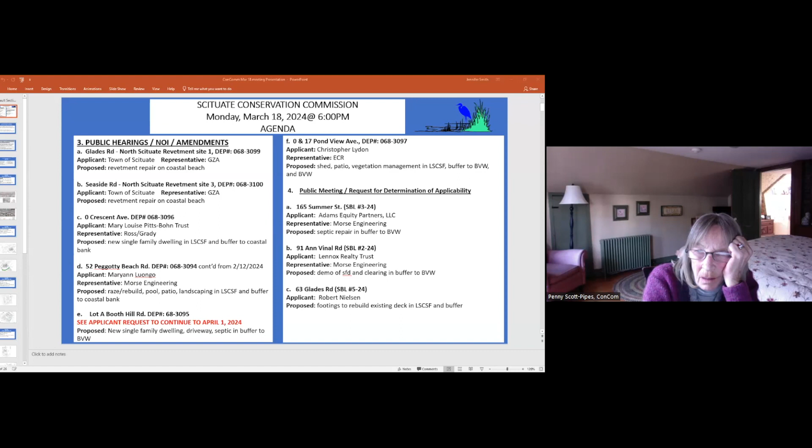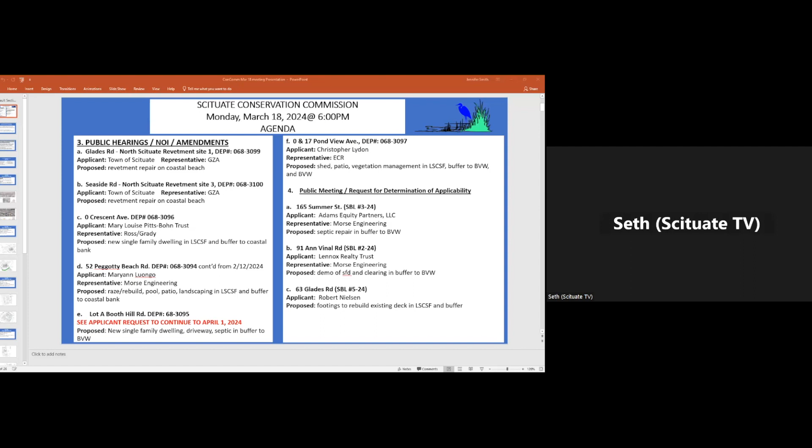So, it's Doug. I don't know. It's Doug because we need Doug to make four. We only have, Mr. Doug is here. Mr. Doug, if you want to unmute yourself, I'm going to ask you to. There you go. Hold on here. You do have Doug. He's just not unmuted himself. He only wants to be half in. Hey, there we are. There you go. Hi Doug. Awesome. Hello. Thanks, Seth. Thanks. Keep an eye on us.

So we have Penny, Doug, Eric, and myself at the moment. Yeah. Okay. And we're hoping for Brendan. And we're not expecting either Jen or Richard this evening, correct? Correct. Okay. All right. Well, I think we're ready to at least kick the ball.

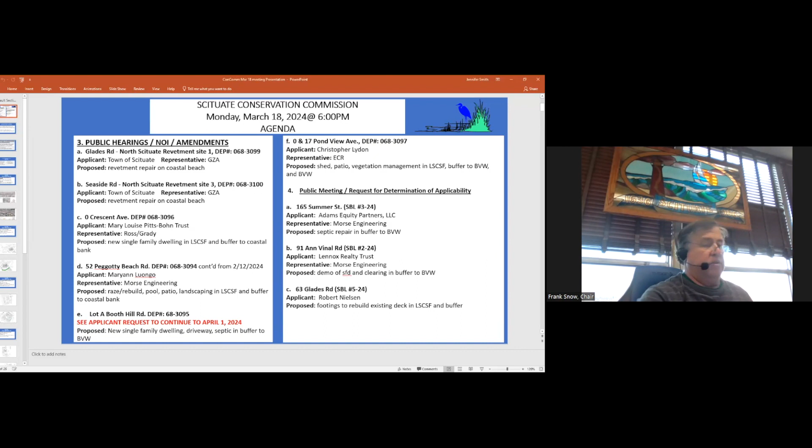So welcome to the Scituate Conservation Commission meeting for Monday, March 18th. I just got a couple of quick things to read. This meeting's being held virtual as an alternate means of public access pursuant to Chapter 20 of the Acts of 2021 and temporarily amending certain provisions of the open meeting law. You're hereby advised that this meeting and all communications during this meeting may be recorded by the town of Scituate in accordance with the open meeting law.

And number 2, the town of Scituate's commitment to diversity, equity, and inclusion. The Scituate Conservation Commission is committed to providing an environment of respect during our meetings. We ask all members to interact in a polite manner, even when there's disagreement. We value the participation of our community and want all participants, including marginalized and minoritized communities, to feel welcome and respected. And we ask our committee members and all who participate to commit to these standards and to support and respect our community.

With that said, we have an agenda. And maybe at the end of the agenda, we could just run by a couple of things of Appleton Field by whoever wants to comment. Eric, certainly. Any other questions? I think that was the only addition. Do we have any other additions or omissions? No. Okay. So I'll make a motion we accept the agenda as written and with the add-on of talking about Appleton Field. Thank you, Penny. You're welcome. So somebody needs to second it. Oh, I second that. Thanks, Penny. So Doug, all in favor? Eric? Yep. And Frank, yes. Thank you.

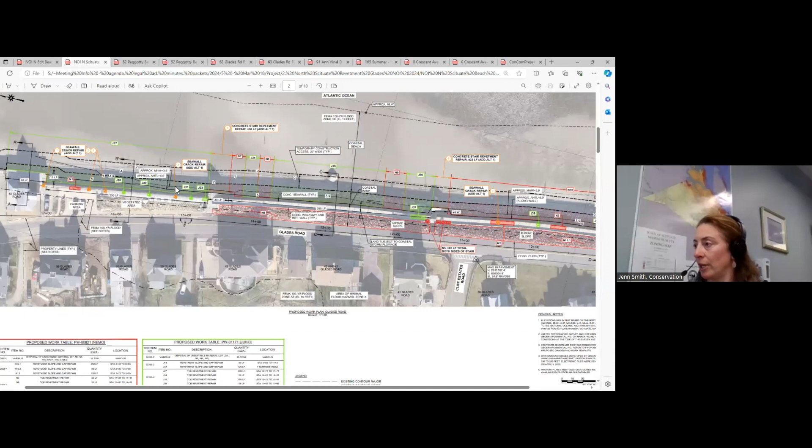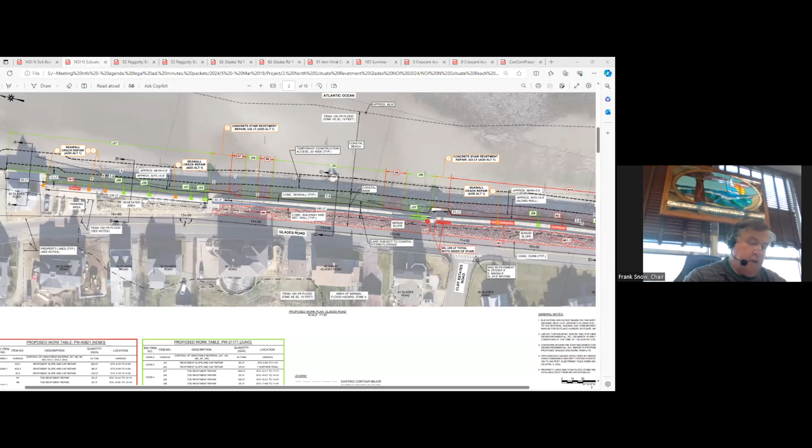Okay, so the public hearing NOI, amendments, the first one, Glades Road, North Scituate, revetment, Site 1. Who do we have on for that? And I gotta open that. Oh, yes. We've got a few people. Yeah, they're all here. Let me get that. Opened on March 18th, 2024 at 6 p.m. The Scituate Conservation Commission will hold a wetlands hearing under Chapter 131, Section 40 of the Massachusetts General Laws and Section 30700 Town of Scituate Code of Bylaws regarding the application of the Town of Scituate for work related to repairs to existing shoreline structures of seawall and stone revetments located in North Scituate by Seaside Road, Scituate. Abutters and other interested parties are invited to attend. Information to access the virtual meeting will be available on the agenda posted on the website.

Okay. And who do we have for this? Good evening, Mr. Chairman. Sean McCarthy, DPW Engineering. Oh, good evening, Sean. Also tonight with me is David Smith, our GZA coastal consultant that's prepared the drawings and the NOI for you this evening. Sean, before we go, should I open both of these? Do we want to talk about these together or are they totally different projects? Yeah, they're different locations.

We were trying to bid them together, only to save costs, by selecting a contractor that would move to each location. Okay. Permitting has disrupted that a little bit. There is a Site 2 that you'll be seeing next month. I think we finally resolved those permits. But we've taken a little different avenue on these. Prior to opening these Scituate conservation hearings, we've gone through all the state and federal permitting. Wow. So we have all our answers from those agencies prior to you developing your orders and closing. Okay. All right.

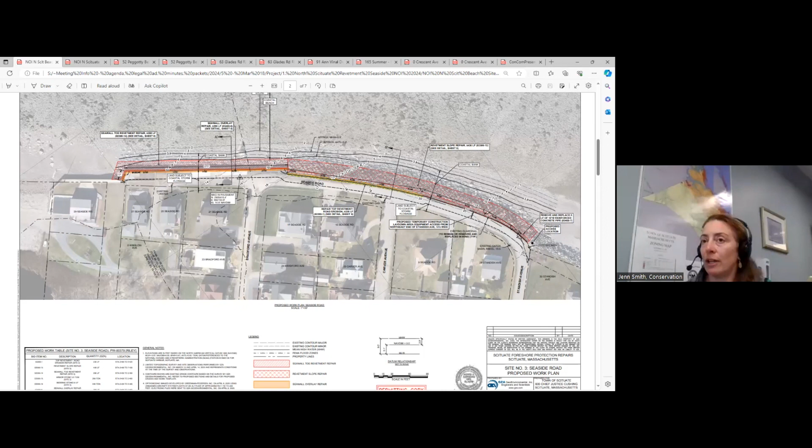Well, I guess we can just open this one and then we'll jump to the next one. Or I see Seaside up on the screen now. Is that the one you read? I just read Glades, I think. Oh, no, I did read Seaside. I'm sorry. You know what? I'm going to open both of these and then we can just roll from one to the other. All right. Okay. You guys can address them separately, but they'd be kind of the same.

So on March 18th, 2024, at 6 p.m., the Scituate Conservation Commission will hold a wetlands hearing under Chapter 131, Section 40 of the Massachusetts General Laws and Section 30700 Town of Scituate Code of Bylaws regarding the application of the Town of Scituate for work related to repairs to existing shoreline structures of seawall, ramp, and stone revetments at location North Scituate by Glades Road.

Abutters and other interested parties are invited to attend. Information to access the virtual meeting will be available posted on the town website.

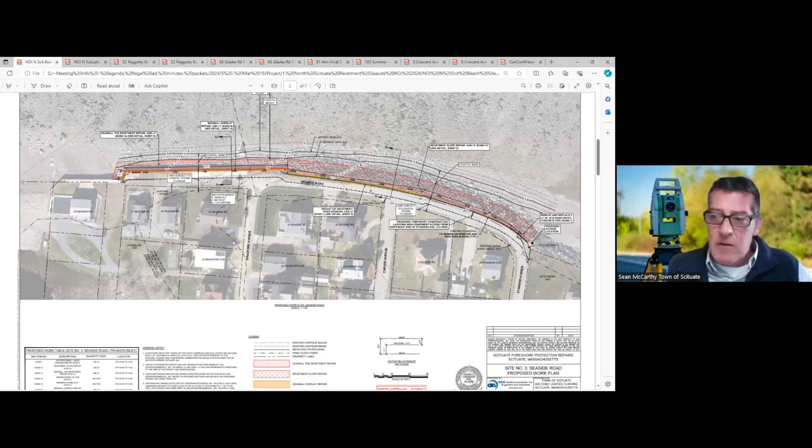Thanks. So you guys can launch it in whichever one you want to. Great. Yeah, I'll turn it over to David. He can better describe some of the details on both of these projects, but I will be here to answer any questions. Thank you, as well.

Sean. Right, thanks, Sean. If we could go back to the Glades drawing, I was gonna start with that one first. Yep, perfect. So good evening, Commissioners. My name's David Smith. I'm Project Manager with GZA Geoenvironmental, 144 Elm Street in Amesbury. Here representing the town of Scituate on this project, the North Scituate Beach Revetment Design Project, and this is Site 1. And Site 1 is predominantly along Glades Road in North Scituate.

The project is to address damage that has occurred to these coastal engineering structures as a result of 3 storm events, Nemo, Juno, and Riley from 2013 up to 2018. And then this Site 1 is actually further subdivided into 1A, 1B, and 1C. 1A is the area to the far left of the drawing here on the screen, and that's in front of 62 Glades Road. And that particular area is a stone revetment that is fronting an existing seawall.

And then the area just south of that, along that whole stretch of Glades Road down to the access ramp at Glades and Gannett Road, it's about 1,700 odd feet, is what we're calling Site 1B. And then Site 1C is off this drawing, and that's further to the south. It's a 125-foot revetment fronting 7 Surfside Road.

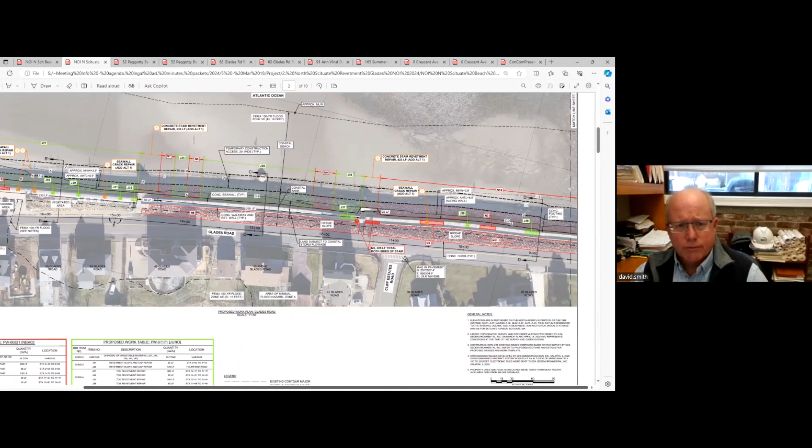We're looking to, as I mentioned, access this from both Glades Road with equipment, and then also accessing it along the beach in that 20-foot path from two locations. One is the access right of way north of 62 Glades Road, which is to the left of that drawing that's shown, and then also the access beach opening at the intersection of Glades and Gannett Road further to the south. And that access will also provide access to the area of revetment at 7 Surfside Road.

So we're looking to hopefully put this together to go out to bid in the fall of this year. And as Sean mentioned, this being site 1, you'll hear shortly from site 3, which is Seaside Road, and site 2, which will be before the commission, either the next hearing or, I think it'll be the one after. And that's an area at the end of Surfside Road in front of 91 Surfside. So all 3 of these sites we're going to try to bid together in the fall under one contract.

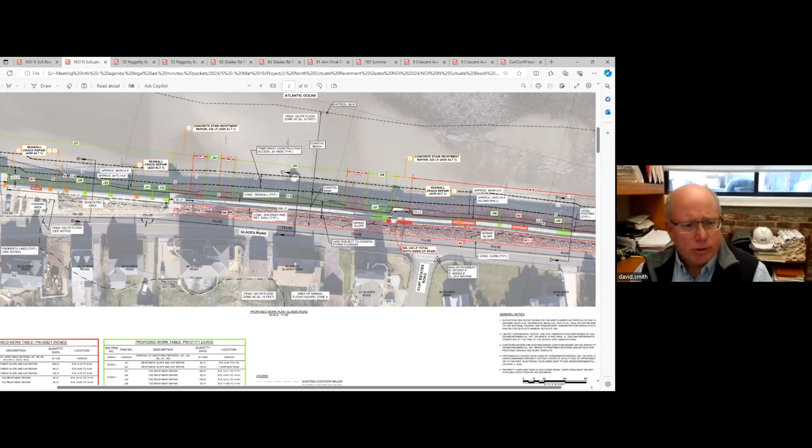As Sean had mentioned, we've obtained other authorizations on this site, and it took a while to get to the point where we're at. But we did get a MEPA certificate, and that was issued in February of 2023, a 401 water quality certificate in August of 2023, Chapter 91 minor project modification to existing licensed structures. That was in July 2022, and most recently, we got an Army Corps permit in December of last year. So with that, I think that kind of explains in summary what we're looking to do with the site. So I'll entertain any questions.

Sorry, carry on. There it goes. Okay, thank you. So I guess, well, why don't I start with some members?

Penny? Yeah, I only really have one question. It's great you have all those permits in order. So, the beach nourishment that's going on down the Gannett south, will that affect any of your repair? Because I don't know how high the sand's going to be coming up. Do you have any idea? Yes, I do. And the answer is yes, it would likely affect what we're proposing. Unfortunately, when we started this project back in 2020, we had the hopes of performing all this work way in advance of having the nourishment project done. Unfortunately, with the delays in this project, that's not the case.

So, in speaking with Sean, I think we're just going to see how this plays out as far as the sand nourishment, and hopefully it stays in place and all is well come the fall. And if that's the case, we'll likely have to adjust our work limits. But we felt that we would like to at least include the damaged areas in this NOI filing and get approval for it, so in the unlikely event that that sand disappears, we could at least do the work. We would have 3 years to do this, so we could certainly try to phase this work if needed, but we don't want to dig through 6 feet of newly placed sand nourishment to repair some revetment that's buried. So we're well aware of that, and we'll make the adjustments if needed. Okay, thank you. That was my only question, Frank.

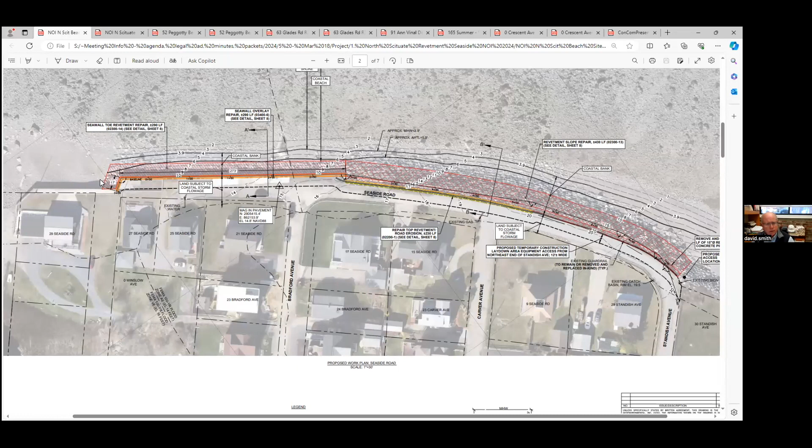This particular project site is a total of about 720 lineal feet, which you pretty much see within the limits of this drawing here. On the left-hand side, in the northern limit, there's a concrete seawall that has a 17-foot return. It kind of juts out from the other seawall to the north of that one, and then it runs north to south about 273 feet. This is an older seawall that's in pretty poor condition.

Got damaged from the Riley storm, March 2018. This whole site is damaged from that storm event. And the seawall got damaged, and also the toe revetment in front of the wall on the seaward side of the wall also got damaged. So that's what you see in the hatched areas on the upper part of the drawing, seaward side of that wall.

And then as you go south, kind of right at the intersection of Seaside Road and Bradford Ave, it turns into a full slope revetment there, where it meanders down to the south and continues along. And that's about 430 lineal feet, about 20 to 30 feet wide in that area. And then at the far southern limit where Seaside Road kind of comes in, where it meets up with this shoreline and then kind of deviates there to the north, there's also an outfall pipe that got damaged during that storm event.

So this particular site, we're looking to do the repairs. Again, it's in-kind repairs similar to Glades. These are prior authorized structures, and we're keeping within the footprint of the existing structures. The full slope revetment, actually both of these particular sites and work areas, we're envisioning that the work can be performed from the land side without the need to access onto the beach in these areas. We feel that equipment can be staged both behind the seawall in that section to the north, with working the revetment there, and also the seawall work, and then the full slope revetment to the southern limit.

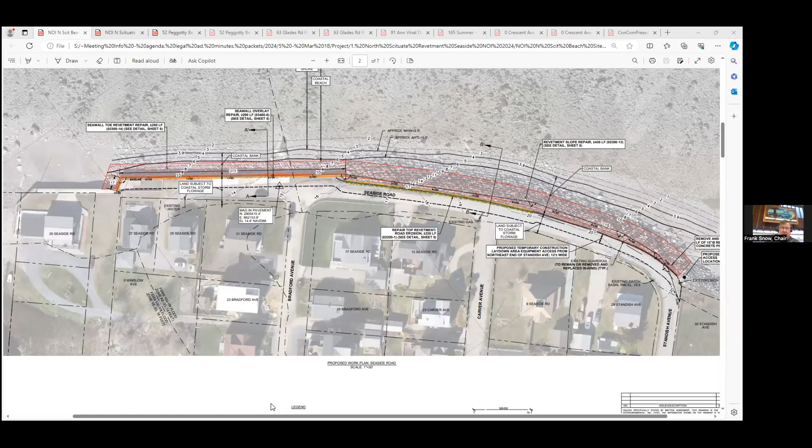Can I ask a question? I'm back to the other project in Minot, and I'm looking at where the ramp is, in a detail section.

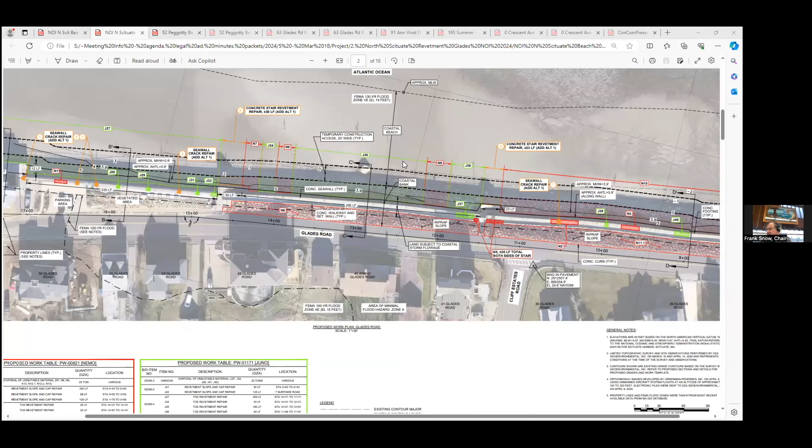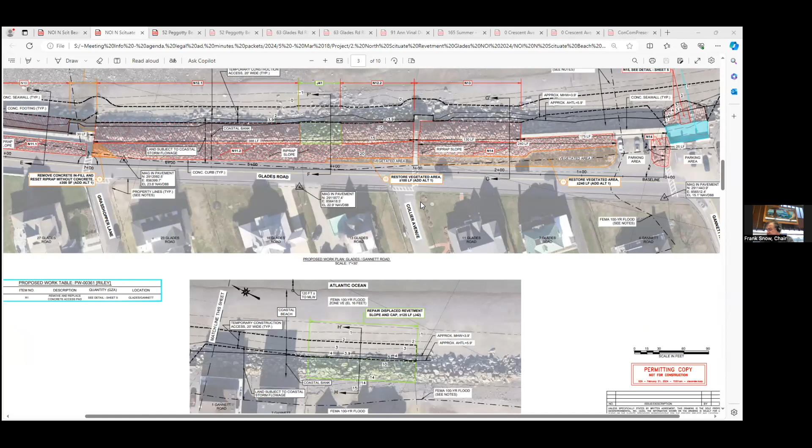So it looks like they're going to continue. There'll be a concrete ramp at first, and then some sort of walk that continues further onto the beach, and then there's stone.

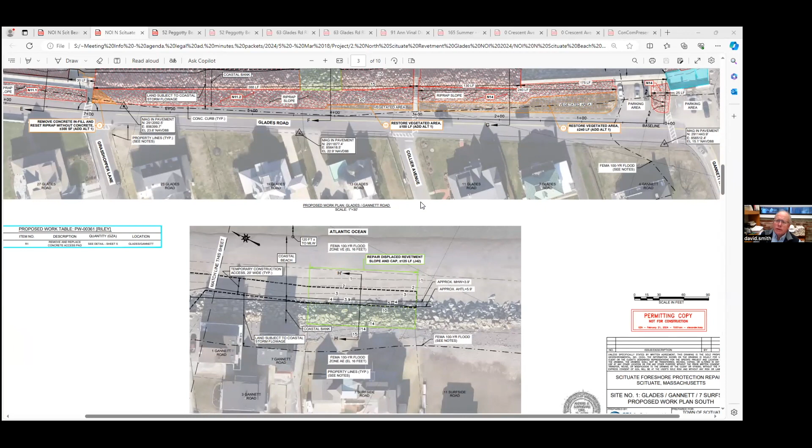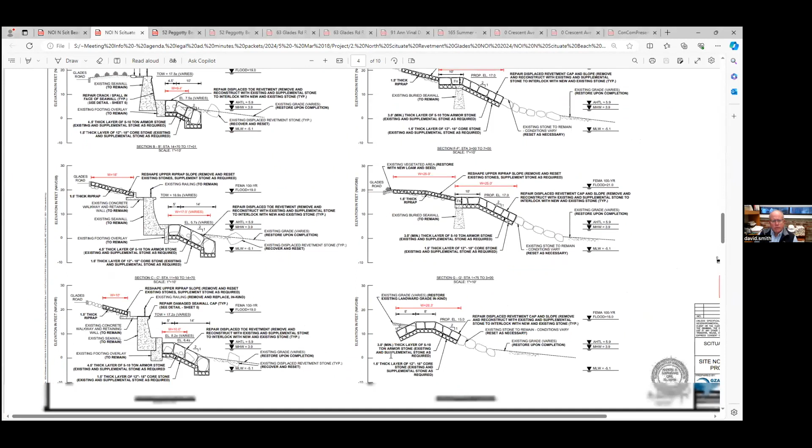Yeah, that's correct, that's what's out there now. There's a detail sheet if you keep scrolling. So there's that concrete, also shown in the photographs attached to the NOI. It's around 52 feet wide and about 22 feet landward to seaward, with another concrete section extending off of that, 12 feet wide and about 18 feet long.

So that area has been significantly undermined, causing that concrete slab to crack, and that's what happened during the storm event. The 12-foot width at that seaward section does make for nice access onto the beach in this location, and it's typically been used for access in prior storm repairs over the years.

So all we're doing here is basically replacing the concrete in kind. That edge of the 52 by 22 area is going to have a deeper extent to the concrete slab, almost like a footing, which you can see in the cross sections to the right. And we're going to improve the wing sides of that other section of ramp, fortifying it with stone that's there now, but removing and resetting it to prevent future undermining.

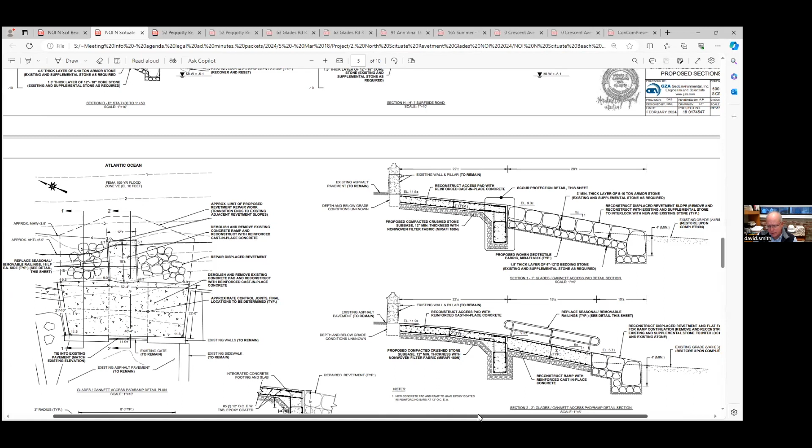And then that access ramp, the 18 by 12, will also be reconstructed, and that's going to have a revetment out in front of it to help protect it, because at the time we looked at this, the beach was significantly low. You can actually see that by the lower right-hand side, showing the existing grade line.

Now, the nourishment work that's taken place has pretty much buried this whole ramp, and I think that was the intent, to have it buried. But in the event that for whatever reason we're able to get this work done, that was going to be the plan, to rebuild that whole ramp system.

Thank you. Anybody else? Jen, any other thoughts or comments? Nope, it's good, I don't have anything else. We don't have anybody else in the audience with any questions.

I'll make a motion if you like. I make a motion we close Glades Road, North Scituate, revetment site 1, and Surfside Road, North Scituate, revetment site 3.

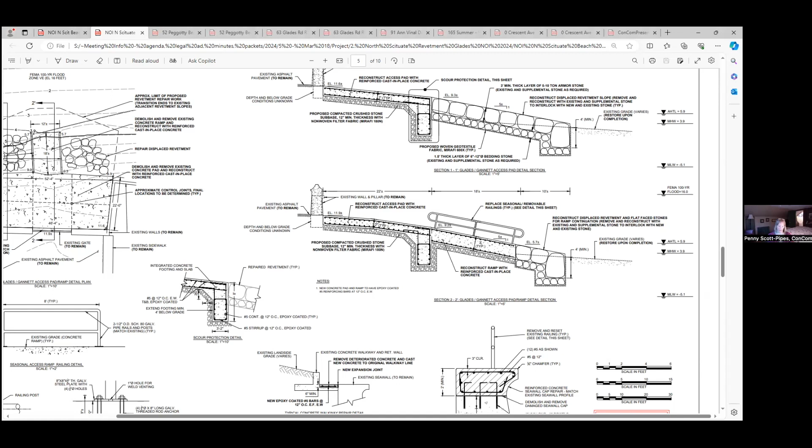So now, Lot A, Booth Hill Road, they've requested a continuance to April 1st, Jen? Yes, continue to April 1st.

Do you want to skip down and do that now, Frank? I think, well, that's the next one. Well, on my sheet it's not, but that's okay.

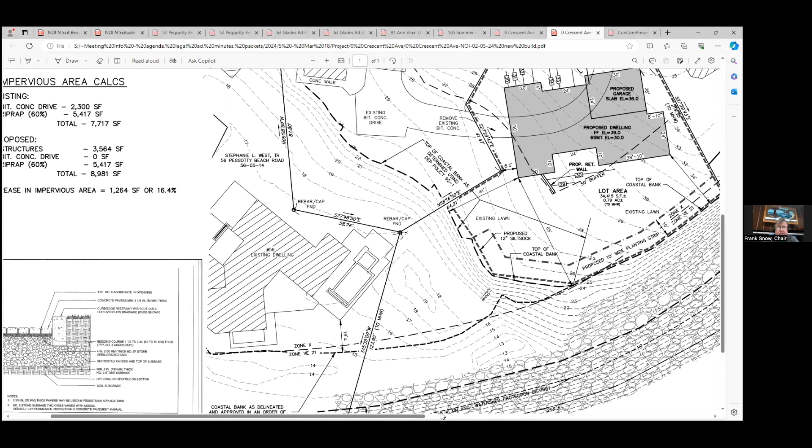Yeah. What we're doing is taking credit for the voids in the revetment. We're assuming that 60% of the riprap is pervious. What was the percentage? 60%. Really? 5,417 square feet. You can see it on the plan to the left there. And the driveway was 2,300 square feet. That's in the existing condition.

That's a total of 7,717 square feet. Then below that, we figure in the footprint of the house, which is 3,564 square feet. The bit. concrete drive is 0 because that'll be pervious. Then we added in the 5,417 square feet of the existing riprap and the revetment. That's a total of 8,981 square feet in the proposed condition, which is an increase of 1,264 square feet or 16.4%, which is below the 25% threshold.

The other threshold is that the proposed drainage patterns would stay the same, in that the water's flowing down that embankment and getting into the riprap. We aren't proposing to change the drainage patterns on the lot, but the impervious area calcs alone would put us below the threshold of 25%. So that's why we haven't submitted any stormwater calcs.

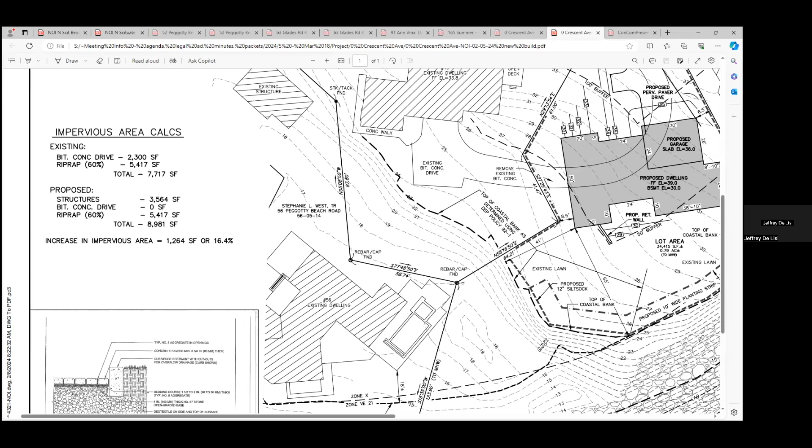Just a quick one, Paul. I don't know how you would... maybe Doug can help with that one. How do you figure an impervious area for a seawall or a revetment? For the riprap? Well, those are fairly large stones and the spaces between them are sizable.

For example, if you had a stone trench with 1.5 inch stone in it, if the trench was 2 foot by 2 foot, approximately 33% of that trench is going to be voids. But that's for the small stones. Here we have a revetment with the larger stones, and the voids are much bigger. So we estimated 60% in the plan. Okay.

I can see where a seawall might almost be considered impervious, even though it has flat surfaces, it's such large areas between them. Right. It almost seems inconsequential. The other thing is the water coming on that roof is considered to be clean water.

And any water running over the lawn is gonna be attenuated by the proposed plantings. It's stated in the narrative and the report from Stan Humphrey, so the plantings in the lawn area will help with any issues of pollution. But the volume of water that would come off the site is just gonna go into the ocean.

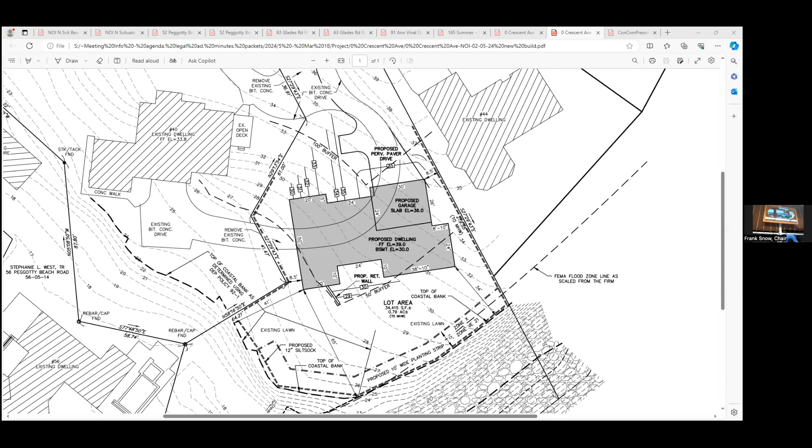And then continue to April 24th? Sounds good. Oh yeah, because we're gonna be on that Wednesday, right? Wednesday, April 24th. Because of town meeting, our second meeting in April is gonna be on a Wednesday night. Yep. Okay, so can I make a motion, Frank? I hope so. Okay, I make a motion to continue 0 Crescent Ave to April 24th. That's a motion from Penny. Do we have a second? I'll second that. From Brendan? Second. All in favor? Doug? Yes. Eric? Yes. And Frank, yes.

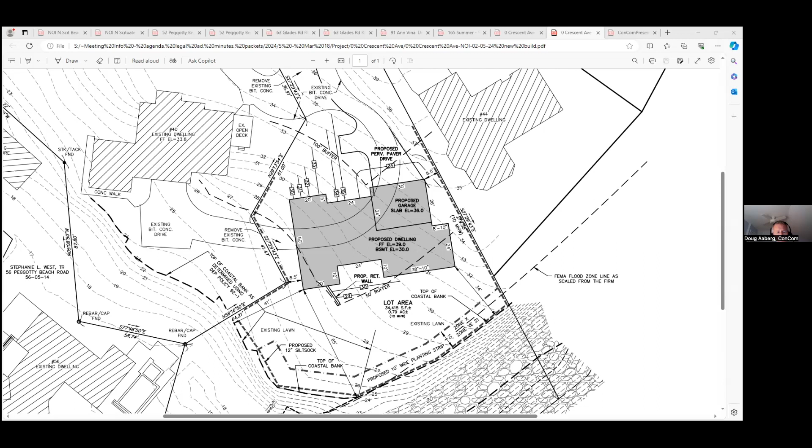Thank you, Jeff. Thank you, Paul. Thanks, Doug, for jumping in on that. Appreciate it. Thank you.

Interesting. 52 Peggotty Beach Road. That's been continued. Right, so you have opened it. Yep. Oh, they're not going to be on tonight? No, it's just, we don't have to open it. It's the next one on the agenda.

Yes. I know I got it mixed up in the beginning, but I think I'm on track now. 2 hours into it. Okay. All right, I think I unmuted. Paul? Yep. Paul Gunn? Okay. Can you hear me? We got you. Thanks, Paul.

All right. So, hello everyone. Just for the record, my name is Paul Gunn. I'm a design engineer at Morse Engineering. Here tonight for the continued notice of intent application at 52 Peggotty Beach Road, which includes the raise and rebuild of a single family house within the 100-foot buffer to a coastal bank.

Since this project was last before the commission, a planting plan and list has been prepared by Hawk Landscape Design for the proposed mitigation area. That plan includes native shrubs, grasses, ground covers, and perennials, and also includes 5 conservation posts that have been provided along the limit of the planting area.

Regarding the site plan itself, there's been no changes made to the layout or location of the house, the driveway, or any of the patios, but a small revision was made per comments prepared in a review letter by Deb Keller over at Merrill Engineering. This revision just included providing a third profile of the coastal bank to better help in confirming the bank's delineation. This profile is now shown as profile C on the site plan and lies between the 2 original profiles A and B. I believe that's all I have. I'll turn it to the commission for questions and comments. Thank you very much.

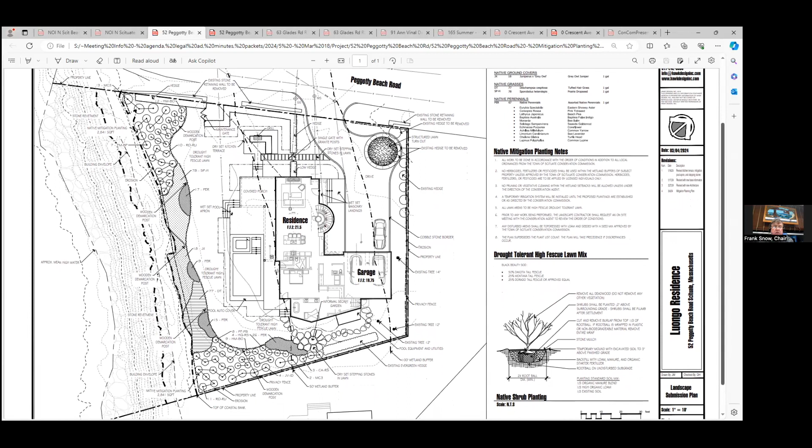About the location of it, Jen? Right. I think Merrill confirmed that. And like Paul said, her comment was adding that third profile. Oh, okay. Do you have a planting plan? A real planting plan, not just this saying mitigation. Yeah, we do. It was prepared by Hawk Landscape. All right, because I'm not finding it in my stuff, that's all. Jen sent it out to us, and I think I just missed it. Bad me, I'm bad.

And this is another one where the limit of work goes all the way to the bank. Okay. Well, they need that to add the plantings though. Yeah, but can there be another one? Can there be one closer for the house and then do the plantings later? The mitigation ones? Yes. The problem that I'm having is when we put these things up and we say

the limit of work is way out at the coastal bank, then the whole site gets used as a construction site and it puts all that construction material right up on the edge of the coastal bank. So if that were another resource area that we were more concerned about, there's no way that we would say it's okay to put erosion control right on the edge of a wetland and let them work to that. Is that a fair analogy? Mhm, yes. Can I say something?

Sure. Please. Okay, this is my feeling on mitigation: I don't want to ever run into another Collier Ave, which has never been resolved as far as I'm concerned. I would like a stipulation on all these properties that have the coastal bank that the mitigation has to be done first, before they start construction on these houses, to make sure the mitigation gets in properly. That would also help keep them away from the coastal bank with the actual construction, because they should want to protect the plantings. I am just very upset with some of the places where the plantings never ever get done. So just having finished. Yeah.

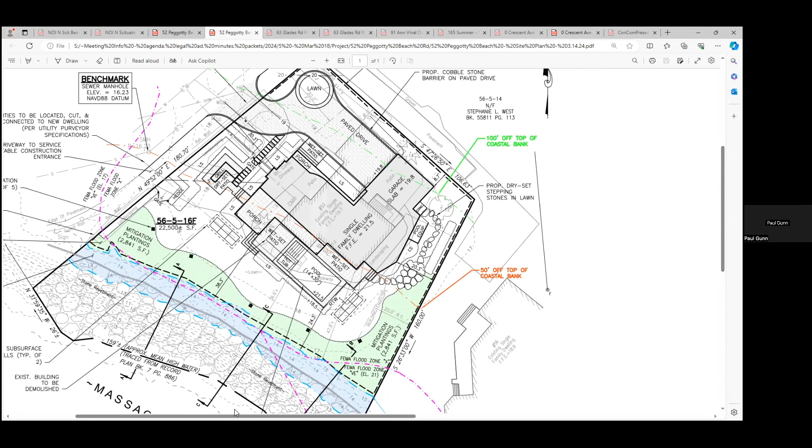Paul here again from Morse. I certainly think a kind of a phase one, phase two, if you will, set on the erosion control is possible. It's a little tighter on the south end by the pool, but certainly up towards the frontage area of the property, having a stage one erosion control closer to the house just for excavation is feasible. Thank you.

I mean, it looks to me like a pretty aggressive planting plan. Yeah, if it gets in. Well, we're gonna have to address that, Penny, as a policy from the commission. I'm not sure how we would address that at this time, other than it's in the orders and we don't give a COC until, and we'll add monitoring years to the plantings. Yep.

But what bothers me, Frank, is a lot of them, they don't care if they ever get a COC, they're gonna live there. They come back to us 20 years from now, oh, I need a COC because I'm selling. Well, so many years have gone by. I don't know. I just have an issue. We've had a lot of problems in the beach areas. But that's an enforcement piece, though, too.

I mean, we could have bonds. We could say, listen, you gotta plant this all out. The people plant it all out. They get their bond back, and then over 10 years, 15 years, to your point, they start encroaching with the lawn, and how do you deal with that? I mean, that could be an issue as well.

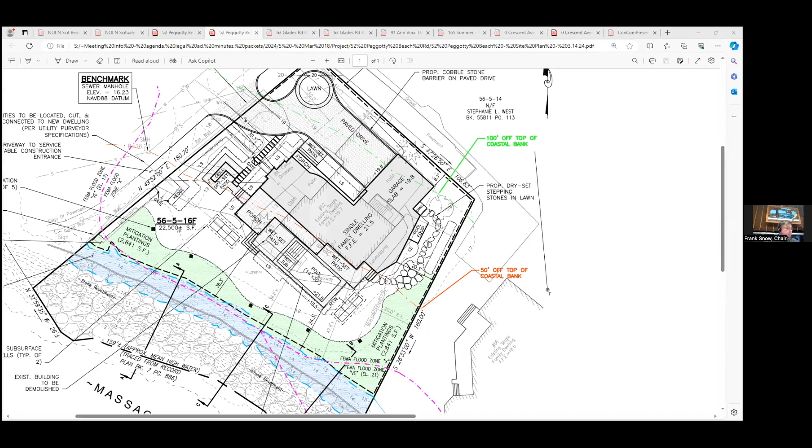So does anybody want to make a motion on this project? Make a motion to close. Do we have a second? I'll second that, Doug. All in favor? Brendan, yes. Eric, yes. Frank, yes. Great, thank you. Paul, thank you, Deb. Yep, thank you very much.

Okay, so now back to Lot A to open that, and I get to continue to open this one. On March 18th, 2024, 6 p.m., the Scituate Conservation Commission will hold a wetlands hearing under Chapter 131, Section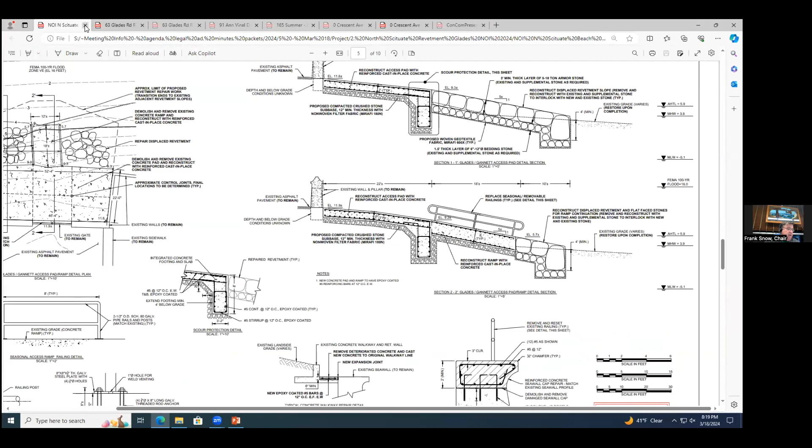40 of the Massachusetts General Laws and Section 30700 Town of Scituate Code of Bylaws regarding the application of Peter Freiling for work related to constructing a new single-family dwelling, driveway, and landscaping located at Lot A, Booth Hill Road, Scituate. Abutters and other interested parties are invited to attend. Information to access the virtual meeting will be available on the agenda posted on the town website.

So we've opened this, but we have a request to continue to April 1st. I'll make a motion we continue Lot A, Booth Hill Road to April 1st. That's Penny. Do we have a second? I'll second that, from Brendan. All in favor? Doug, yes. Eric, yes. Frank, yes.

And just for the record, this is a site that Jen and I had a chance to walk out to, talk with Art Allen when he was doing this wetlands review. It was an interesting project. So sometime, if anybody else has a chance to do that with Art, it can be eye-opening. I read his report, that was eye-opening.

Okay, so now we have 0 and 17 Pond View. So on March 18th, 2024 at 6 p.m., the Scituate Conservation Commission will hold a wetlands hearing under Chapter 131, Section 40 of the Massachusetts General

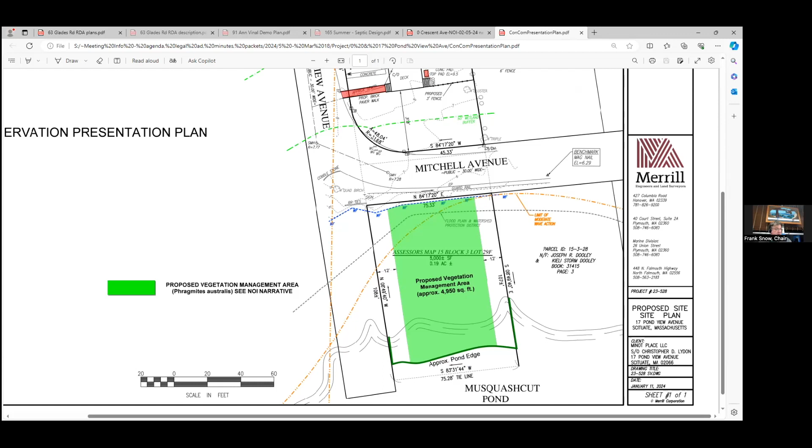Brendan? I don't have any questions at the moment.

Penny? No, it's pretty straightforward. The Phragmites, wow, that's a major job they're willing to take on there to try and get rid of that. But no, I think everything on 17 looks fine to me.

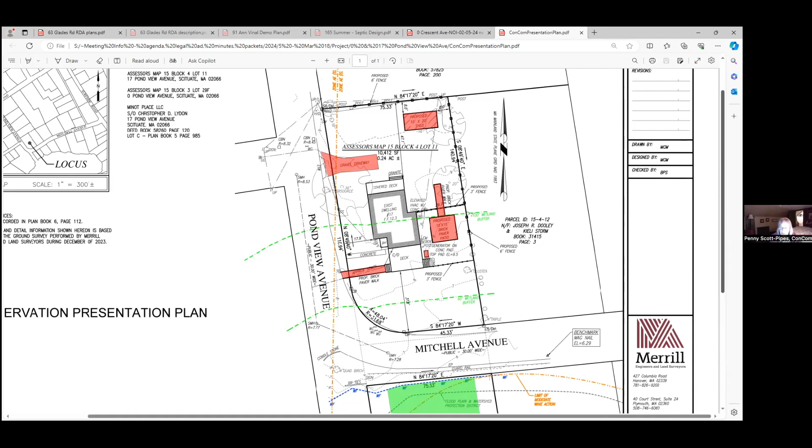Thank you. Doug? Was Brad tell me if I'm remembering it correctly, but some years ago, there was another project on Musquashit, Musquashcut Pond south of this, quite a ways south of this, with a similar project, vegetation management. Is that correct? Yeah, I've done a few in town, like 396 Hatherley. I think you did. You came before us with one. Yeah, I don't think it was Musquashcut. Maybe it was different, no, it was at the other end of Musquashcut Pond.

It was way up towards Mann Hill. Really? Yeah, Mike Gilligan wound up cutting it all down. Oh, well, yeah, but that's on him. That was a little bit more into the buffer of BVW, with some Japanese knotweed in there and some other invasive shrubs. I was just wondering how it was, how it work, but I haven't been involved with that since I did the pre-work meeting with Mike Gilligan. I'll have to see where he's at with that. I was just wondering how it was going, how effective the plan is. I know it's a slow, methodical process.

And you look around there, it's all around the pond, so you get to clear this one spot, but too bad everybody can't join in. But no, other than that, I don't really have any questions. I was just wondering about the effectiveness of it. It has to be managed yearly. It's not something that's a one and done in any event.

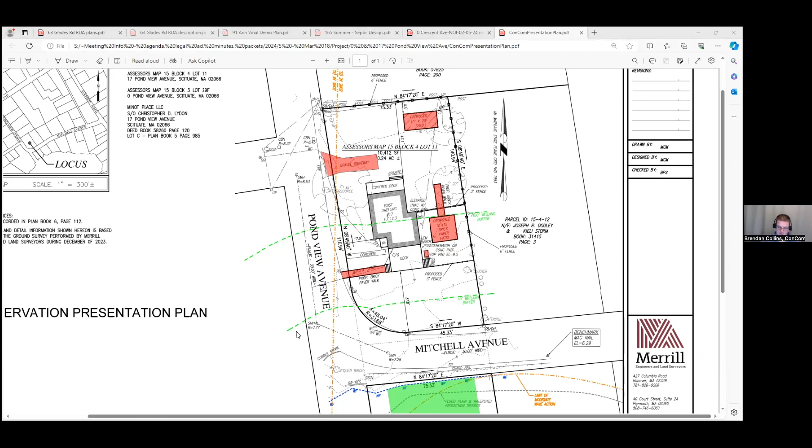Did I miss anybody in the audience? No? Okay, I'll take a motion on this one. I make a motion to close. Do we have a second? Second. All in favor: Brendan, yes. Eric, yes. Frank, yes. Thanks, thank you, good night, Brad. Have a good night.

165 Summer Street. On March 18th, 2024, the 6 p.m. meeting, Scituate Conservation Commission will act on the request of Adams Equity Partners LLC for determination of applicability under the Massachusetts Wetlands Protection Act and the Scituate Wetlands bylaws for activities related to a septic repair at a single-family dwelling at 165 Summer Street. Abutters and other interested parties are invited to attend. Information to access the meeting will be available on the agenda posted on the website.

And who do we have? We have Paul. Are you unmuted? Yep, I'm here. So again, for the record, my name is Paul Gunn. I'm a design engineer at Morse Engineering, here tonight to represent the applicant for the RDA at 165 Summer Street. The site is currently developed as a residential single-family dwelling with an associated gravel driveway and a mixture of lawn and wooded areas. The property abuts other single-family residential lots and has frontage on Summer Street to the west. The site generally slopes towards an existing bordering vegetated wetland on site that was delineated by John Zimmer in November of 2023.

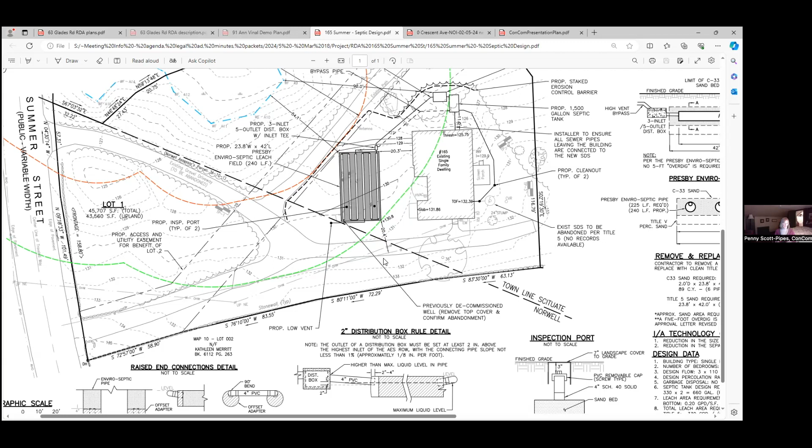Okay. I'll make a motion for... well, next. So this one is not accepting any of the lines. No, you're right, Jen. Yeah, there's wetlands lines going all over the place there. No, we're just accepting a new septic. I make a motion for a negative 3, please. And I'll second that. Second on that was Brendan. All in favor: Doug, yes. Eric, yes. And Frank, yes.

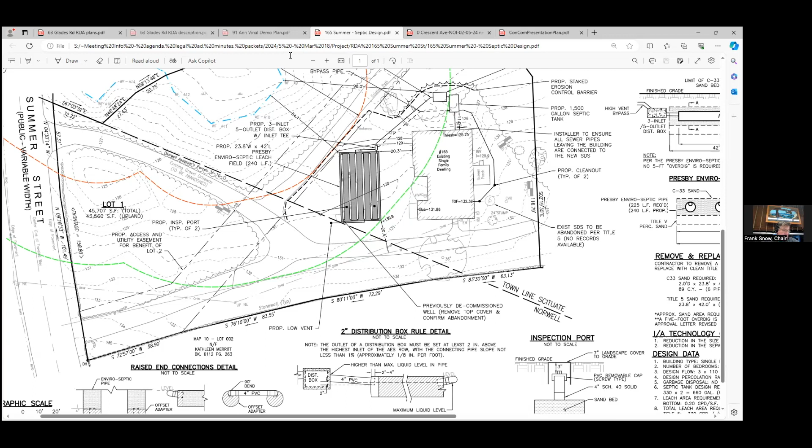Great. 91 Ann Vinal. On March 18th, during the 6 p.m. meeting, Scituate Conservation Commission will act on the request of Lennox Realty Trust for a determination of applicability of the Massachusetts Wetlands Protection Act and the Scituate Wetlands bylaws for activity related to clearing an area and demo of a single-family dwelling at location 91 Ann Vinal Road. Scituate abutters and other interested parties are invited to attend. Information to access the meeting will be available on the agenda posted on the town website.

And Paul, hi, should still be on. Yeah. Yep. Okay. So just once again, for the record, Paul Gunn, design engineer at Morse Engineering, here tonight to represent the applicant for the RDA at 91 Ann Vinal Road. So this site is currently developed as a residential single-family dwelling with an associated gravel driveway, shed, and a mixture of lawn and wooded areas. The property abuts other single-family residential lots and has frontage on Ann Vinal Road to the north, as well as a small portion on Pleasant Street to the northeast.

The site generally slopes to the west towards an existing bordering vegetated wetland that was delineated by John Zimmer in May of 2023. The property is not located in or near any certified or potential vernal pools, protected habitats, or other resource areas. As it currently stands, the existing dwelling is in a very poor, dilapidated condition. So the applicant is proposing the demolition of the dwelling and the shed, as well as the removal of quite a bit of accumulated trash and debris within the yard.

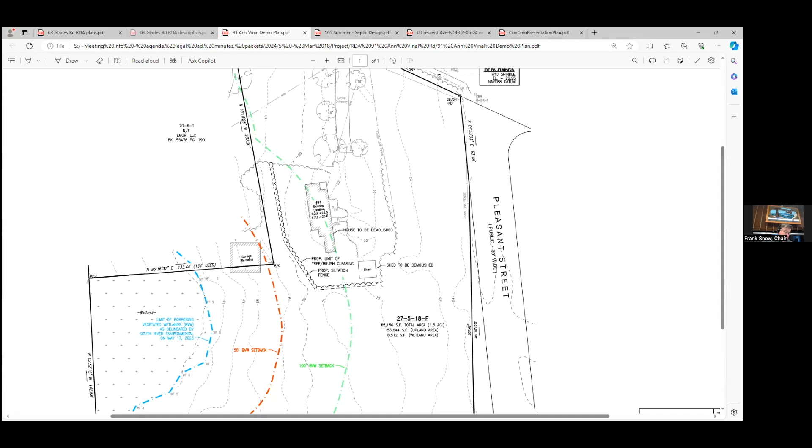So do we have, I think I asked anybody in the audience, Jen, any other comments other than, we're not gonna accept that wetlands line? Just the wetland line. No, when they come back, they'll. Yep. Okay, I make a motion for a -3. Motion from Penny. Do we have a second? Second. From Doug. All in favor, Brendan, yes. Eric, yes. And Frank, yes. Great. Thank you very much. Thanks, Paul. Have a good evening.

You too. On March 18th, during the 6 p.m. meeting, Scituate Conservation Commission will act on the request of Robert Nielsen for a determination of applicability of the Massachusetts Wetlands Protection Act and the Scituate Wetlands bylaws for activity related to a new footing for rebuilding existing deck at a dwelling located at 63 Glades Road, Scituate. Abutters and other interested parties are invited to attend. Information to access the meeting will be available on the agenda posted on the town website.

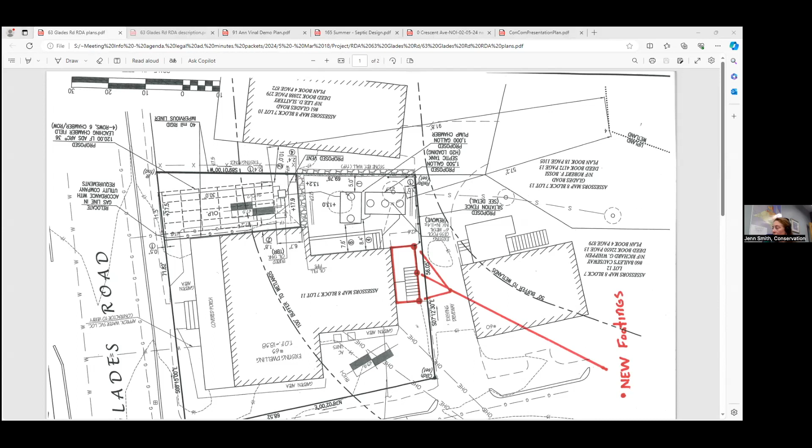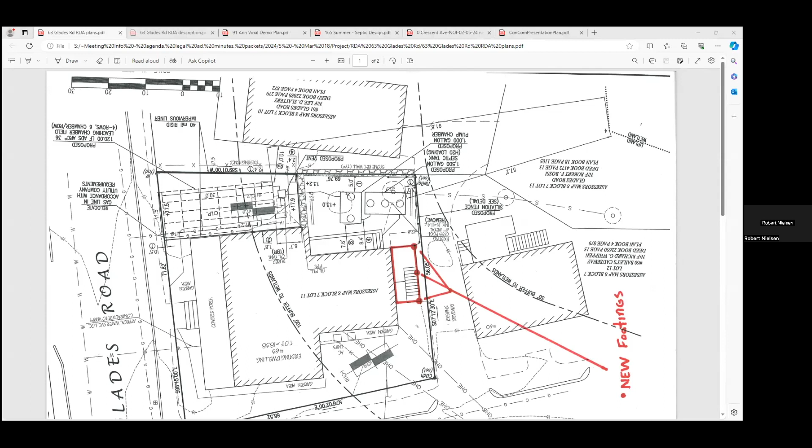And we have Robert Nielsen. Hello, can you hear me? We got you. Good evening. Guys, my name is Robert Nielsen and I represent my homeowner, Michael, and AJN Construction. And we would like to propose a new deck in the existing deck, pretty much the same footprint. Because there's a driveway up against the deck, we can't go any wider, but we would like to extend the width of the deck by about 4 to 6 feet. So there's 3 footings involved, and it's a pretty simple deck, cut and dry. Right, thank you. You get to the stairs? Oh, there you go.

He ran away. Doug? No questions at all. Okay. Penny? No, it looks very good. Brendan? Yeah, I have no questions. Eric? No comment. Why couldn't Zero Crescent be as simple? I know. Jen? Nope. All right, I'll take a motion. Go ahead, Penny. I make a motion for a -3. We're talking over each other. That's my fault, Frank. So motion from Penny. Do we have a second? I'll second that. Brendan. All in favor, Doug, yes. Eric, yes. And Frank, yes. Great. Thank you very much.

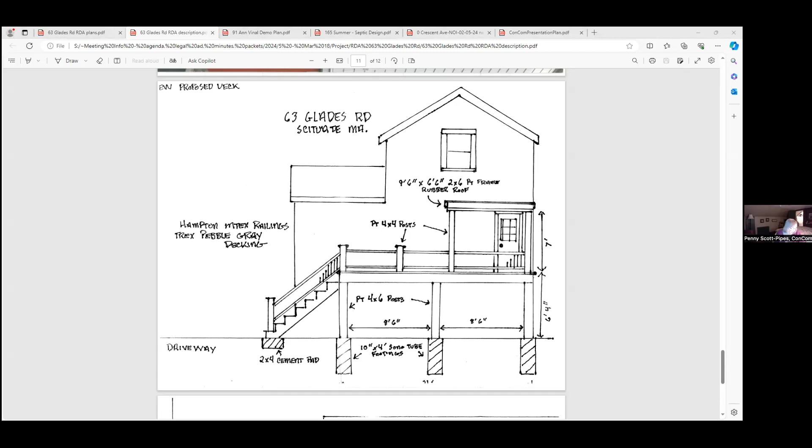Good evening. Thank you. So we are down to a couple of orders of conditions. Yep. I make a motion we accept the orders of conditions for Lot 3, Captain Pierce, and 192 Stockbridge, as written on both. Do we have a second or discussion from anybody? I'll second it. Second from Doug. Anybody else? Any comments? All in favor? Brendan. Yes. And Eric, yes. And Frank, yes.

Great. Okay, and then we have the minutes of January 29th. Accept them as written, please. That's a motion from Penny. I second. Second from Eric. All in favor, Doug, yes. Brendan, yes. Frank, yes. Great, thank you. Do you have any? Appleton Trail?

So yeah, Appleton Trail, actually Eric has been working with a couple of the folks that are out there. And what do they say, Eric? The scouts are gonna go this coming weekend? That's correct. The 23rd, weather permitting, the Cohasset Scouts will be out. Cohasset, huh? And they are going to be, according to Sally, concentrating on the space adjacent to the fenced garden. And they've been instructed to remove fallen posts, the plastic netting that has been entangled in the vegetative overgrowth in that area, and cut multiflora rose and bittersweet to the best of their ability. We'll see how that all pans out. That multiflora is pretty aggressive and gnarly stuff, so I wouldn't be surprised if they don't get to all of that.